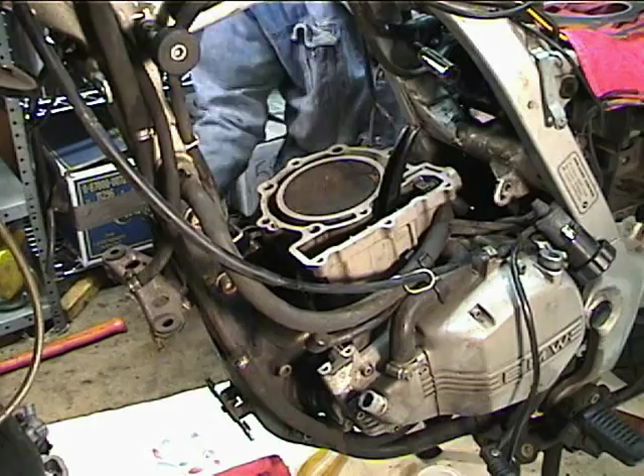The head gasket is on now. Shank cleaned this surface to Shankian cleanliness, and we'll slip the head gasket on here.

That's got a couple of pins that are hopefully going to hold it in place while we put the thing on. I'm going to set a piece of wood block across here. Shank sort of cleaned this head up too, to his satisfaction.

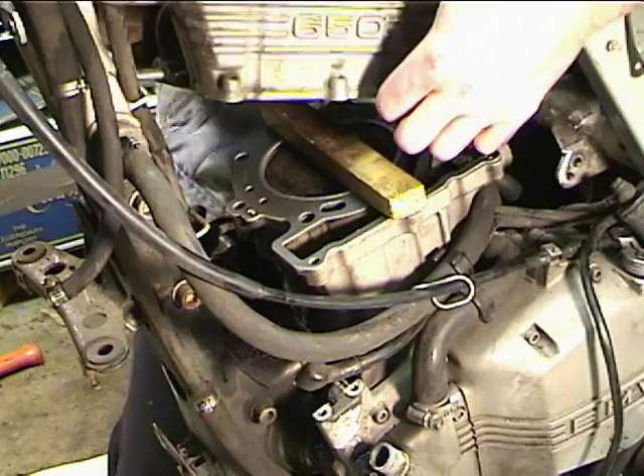I think you're making fun of my cleanliness. It could happen.

Okay, somehow we get the head in. Alright, we got to get the cam chain block up in there. Okay, so now.

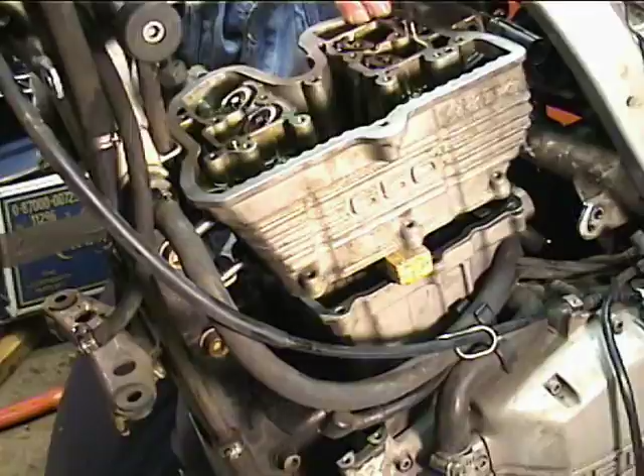We can take the studs, which we carefully filed the rough places off. Slip that through the gasket. Probably the best way to do this. Put all four of them in.

Just screw them in a little bit there so we can get the head all positioned like it's supposed to be.

Alright, so we're going to screw all four of these in.

We've gotten all four of those studs screwed in, so now what we're going to do is remove the block of wood and set the head down on there.

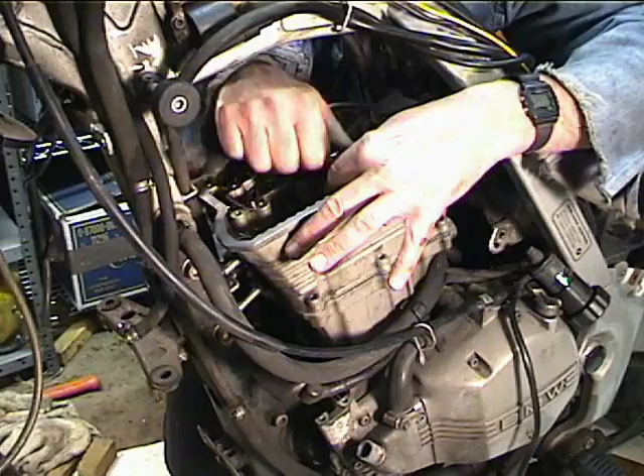And there's an easier way to do this.

So what we've got is the four screws go on the studs from the top, and there's two bolts that go through the head into the cylinder, and then there's the bolts in the front and rear that go up from the bottom of the cylinder up into the head, and then there's the three little ones that go along there.

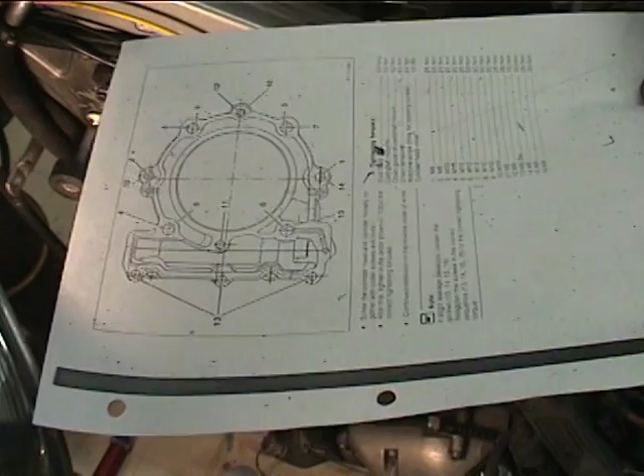Okay, this is the torque diagram. We've got it positioned like the head is positioned here. There's one of these on f650.com, fact.f650.com. So this is the way that it works.

1, 2 - those are the two bolts that come up from the bottom in the front and the back of the cylinder. They get torqued to 28 Newton meters, and then we do 3, 4, 5, 6, 7, 8, 9, 10.

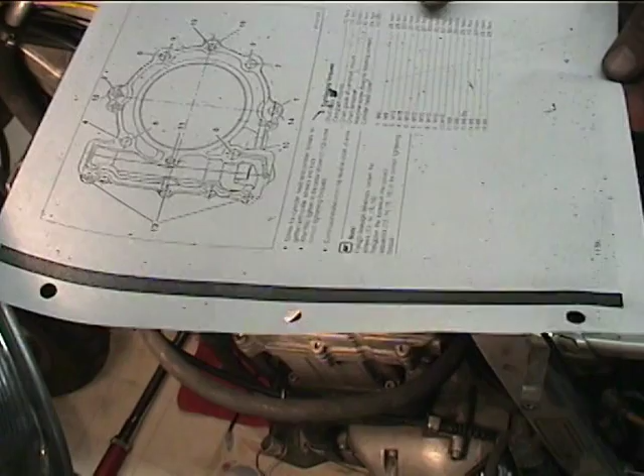So in 2 stages we do the studs. We go 20 Newton meters and then 50 Newton meters, and then we go back.

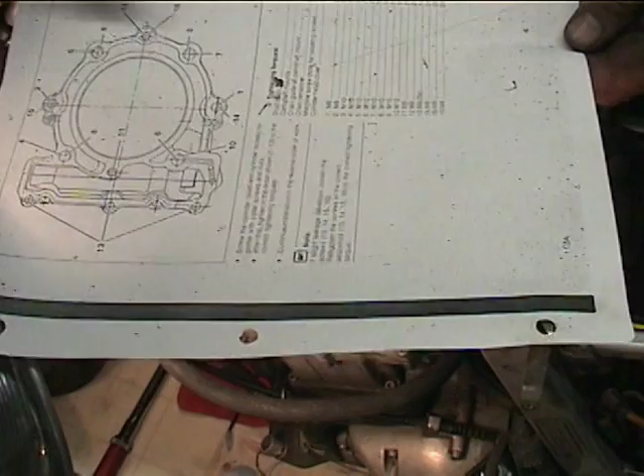And we get these guys from inside at the top. We get this guy and this guy, and then we get the 3 on the tower, and then we finish up with the same ones that we started with, just to recheck them at 28 Newton meters.

So I don't know, there's the chart. You can look at it and admire it, and maybe you can even see it.

So what we're going to start with is number 1 and 2, the rear and the front, at 28 Newton meters. So we've got a torque wrench set to 28 Newton meters.

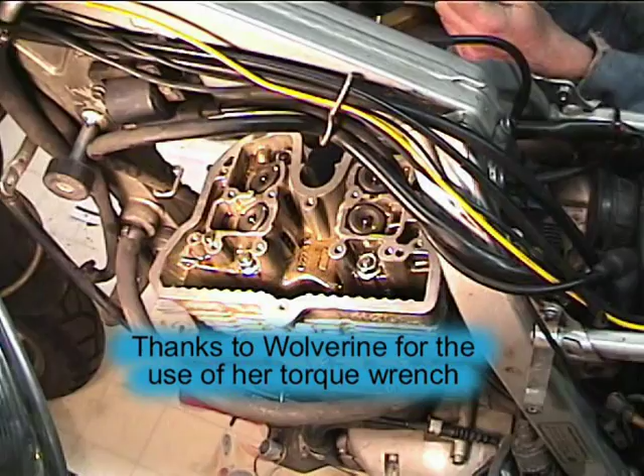Okay, I don't think... I got to come around the other side.

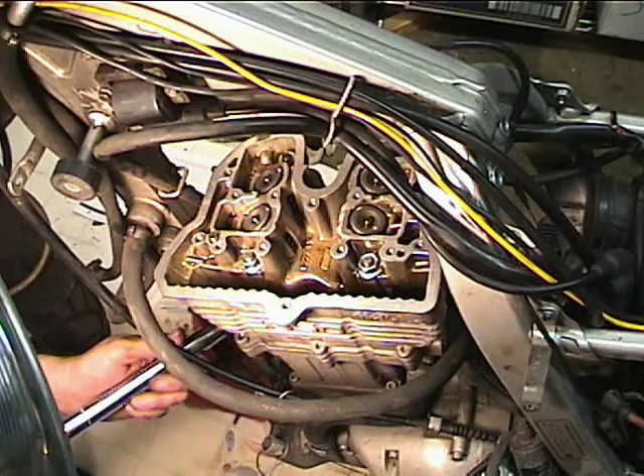Alright, now we're going to reset the torque wrench to 20. I thought we were on 20. No, we were on 28. Oh, 28. Okay, so now we're back down to 20.

You can hear a little click the torque wrench makes when it reaches the proper torque, but that's where we stop.

That right there. Okay, now we're going to reset to 50. To 50? Yes, to 50. Reset to 50 and go around again.

Number 9. You didn't do 7. We're going to do 7. This one's 7. You started on 8. Oh, okay. Doing them in the right order.